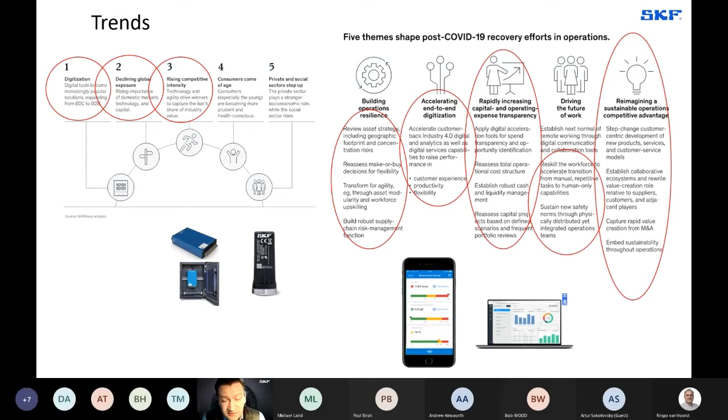And what I'm going to share today with you is some specific areas that you can see down here: sensors, connected technologies, and how SKF can provide value in these areas for you, our clients, and the industry.

SKF - just jumped forward there, sorry. The vision of SKF is a world of reliable rotation. We see the future as digital, electric, and clean. Our 6 strategic focus areas are digital sales, new business models, innovation, our world-class manufacturing to support that, future in our workforce, and clean tech - sustainability is a huge part of SKF's value proposition.

How does this affect connected technologies, sustainability, etc.? What I'm talking about here today will align in the interest of the customers, SKF, and the environment. The value and vision is sustainability for ourselves and a lot of our clients, and how connected technologies play a major part in that.

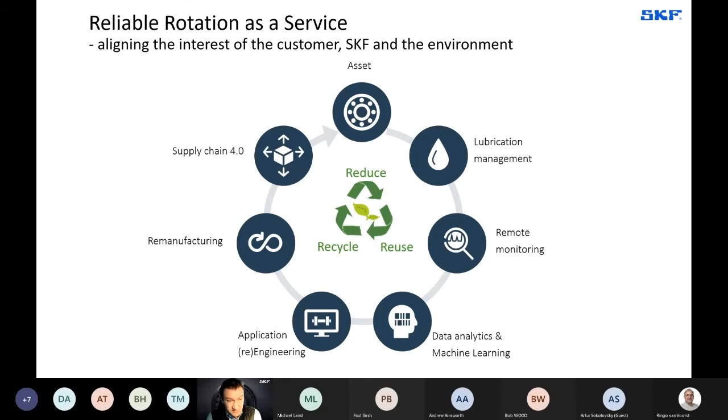If we can enable our customers to both reuse and extend the life of their components, their machines, their manufacturing, this all has a positive impact on the sustainable environment. And I'm going to show you some key components of our value proposition that contribute to that today.

We mentioned earlier there's a shift in business models, or creative business models. SKF historically has been market leading in products and bearings technology for rotating equipment performance, complemented by some advanced services. There's a major shift now from those transactional products and services to outcomes, and the focus is on business outcomes from our customers.

You'll see a lot of digital technologies here today, complemented with SKF products. Our focus is on the productivity and efficiency, the environment, sustainability, and business and financial targets of our clients.

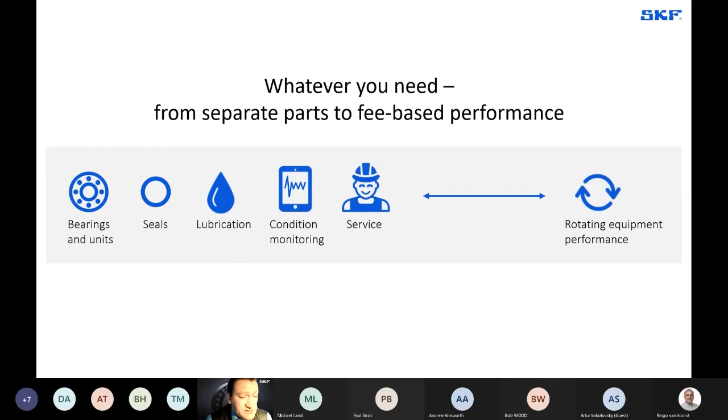How do we do that? We combine all these various elements, whether it be bearings and units, seals, lubrication solutions, condition monitoring, and services for rotating equipment performance. We focus on the client's goals, the client's pain points. We have benchmarking tools, assessments to discuss, and then focus on what products, services, and solutions can combine to meet your plant performance and KPIs.

If you take here a historical view, that products and transactionals is not going away. That's still our core business. It's still extremely important to a lot of our clients.

If we look at digital connected technology, our focus is on the performance and KPIs and what we can combine, and these steps here shown within our service contracts enable us to achieve the plant output and availability for our clients.

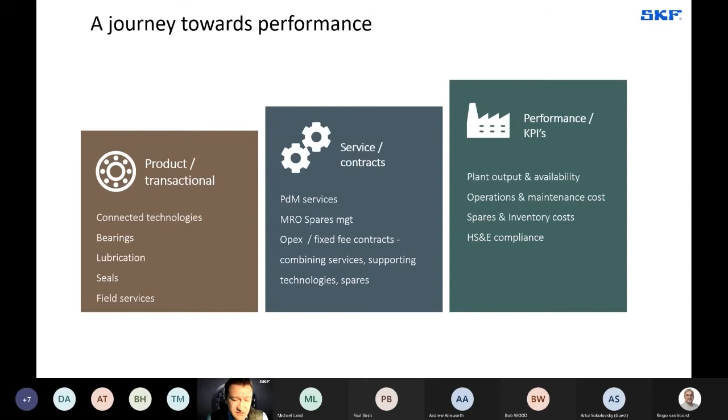I'll go into a bit more detail about that. We have wireless single point sensors. We have mobile devices for walk round routes, and then we have some more specific areas: TraX Automotive, railway devices, and unique sensor bearings, also areas of fibre optic sensing.

We have further webinars. There's a rail webinar in June around specific rail areas, and these other areas will come up. So if you need more information, you want one-to-one, please let us know. We can take that, and there are further webinars I'll share at the end on these areas.

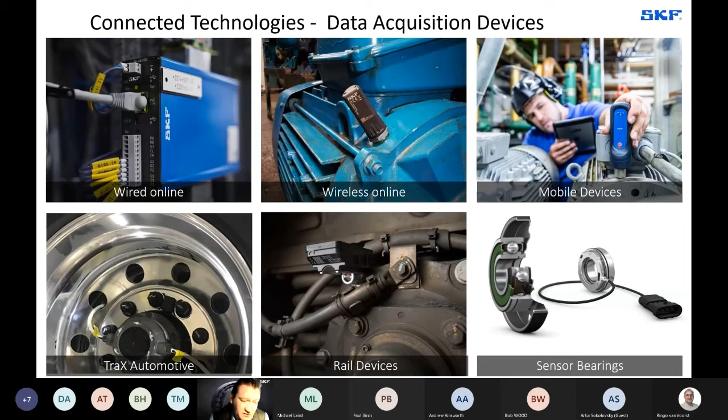So using these data acquisition devices and technology I just showed you is fantastic, and there's a lot of technology out there in the marketplace at the moment of sensors and solutions that you can buy. I think it's really important, and where SKF add value, is turning those sensors and technology into solutions.

And how do we do that? SKF has over 100 years of rotating equipment performance and application engineers around bearings, lubrication, seals, failures, root cause failure analysis. That knowledge has been built into our analytics and software to enable analysis, diagnostics and prognostics to enable decisions and actions.

And that is a continual evolution. It's happening at a low level and a high level, and I'll give you some more information, but that's a key focus for SKF. We spoke about business KPIs.

That's only collecting data and enabling the collection of data via various technologies and solutions, which is fantastic, but what do we do with that data? How do we turn that into decisions that can affect your business and improve your business?

The way forward with these connected technologies, our future is one software platform. We are not there at the moment. By 2022, we will be feeding all our technologies into the one platform. I think it's important to show everyone the roadmap and the vision, where we will be and where we are.

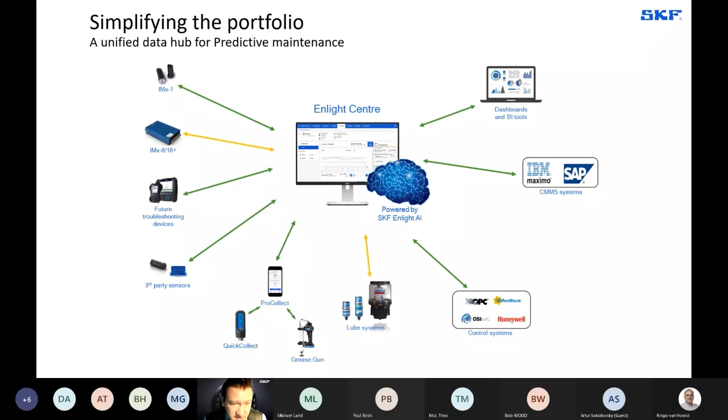So there's a wide array there at the moment. They're working in a few different platforms, and going forward in 2022, we will have them integrated to our front-end dashboard.

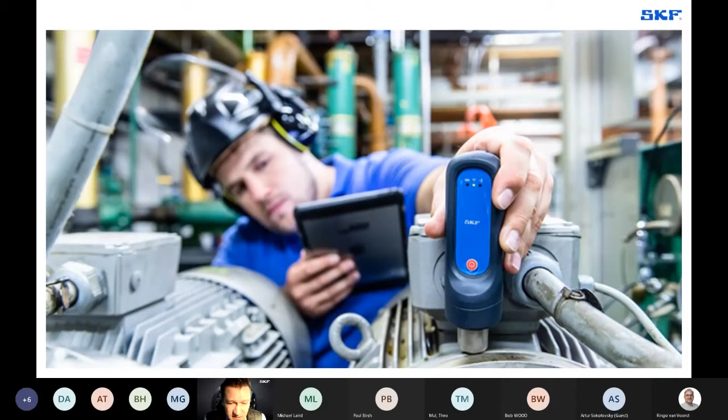One of the entry-level products I'll show you is our SKF QuickCollect sensor. This is a sensor for vibration and temperature monitoring. It connects to a phone or an iPad using either Android or Apple iOS. It's an app you can download in the store at the moment and have a look at that. This enables an entry-level vibration analysis and machine health check that can be scaled up into various different business models.

We have customers using this tool and software to provide their own analysis and reporting. They can then tap into SKF remote diagnostic services, or they can have a tailored business model for both, doing a level of analysis and reporting themselves and utilising SKF in other areas.

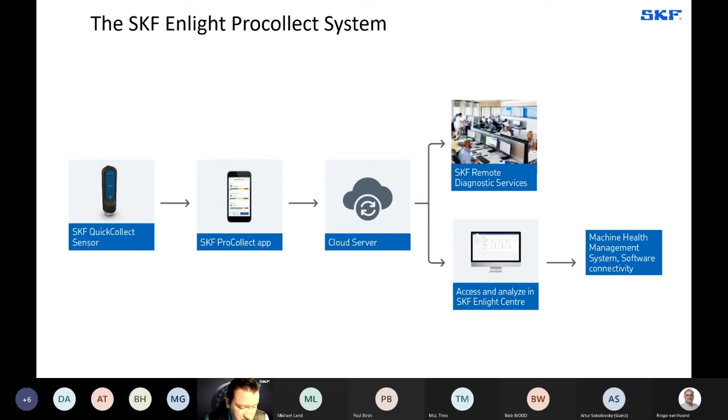So that's your entry level product you can use in facilities, operations, sites for vibration, temperature, machine health monitoring. The beauty of it is it can be upscaled into both basic machine health up to a performance contract. You can see there the kind of visuals and graphics you would get on your iPad or mobile device - vibration, enveloped acceleration, a picture of your equipment. You can also use this for lubrication routes and watch keeping, not just vibration and temperature. It can really be expanded into an overall solution.

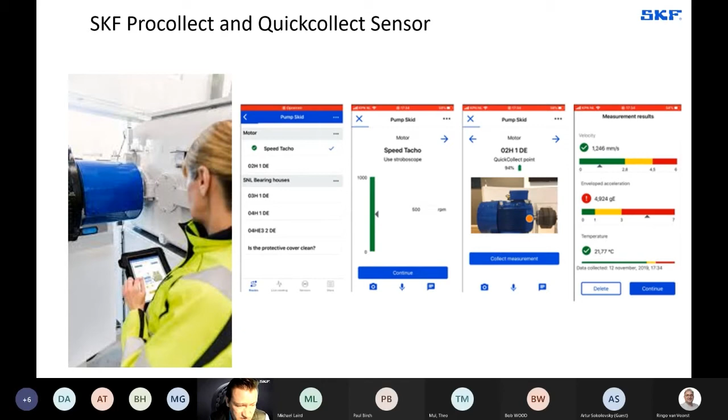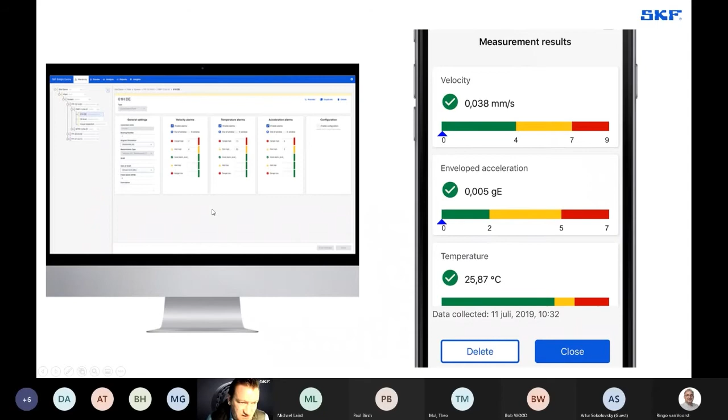This then connects to our software, Enlight Centre, which can be expanded - as I showed you at the start, encompassing more and more devices as we move forward. In Enlight Centre you can start to do more trending, monitoring, and dashboard facility across your whole equipment range.

This is a little bit more detail on the software package in Enlight Centre. We can see here an example with bearing housings. This contains an insights page where you can see common failures, bad actors, and what areas need addressed. It's continually evolving, taking input from customers and clients on what works best and what's most effective for them in their operations.

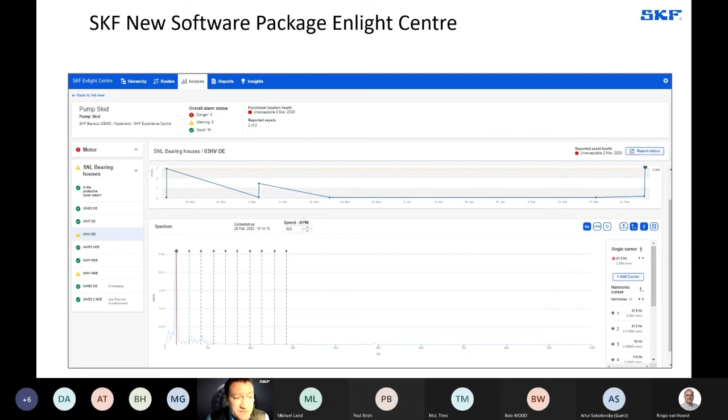Then moving on to more wireless sensors. Everyone sees wireless at the moment reducing the need for people to be on site, walking around a facility. There's huge value in that when you think of non-contact and safety at the moment - we want to reduce the amount of labour-intensive activities.

This is our IMX1 system setup. These sensors are a really attractive and scalable technology that connect to a gateway, which then connects to a collect manager and connects to SKF Cloud. You can see the results from these sensors both on site, and SKF can check the results on the cloud, giving you asset health warnings. This is quite a paradigm shift in scalable technology and sensors to be deployed across facilities and operations.

It was just released last year, and it's grown significantly across the world and here in the UK at the moment.

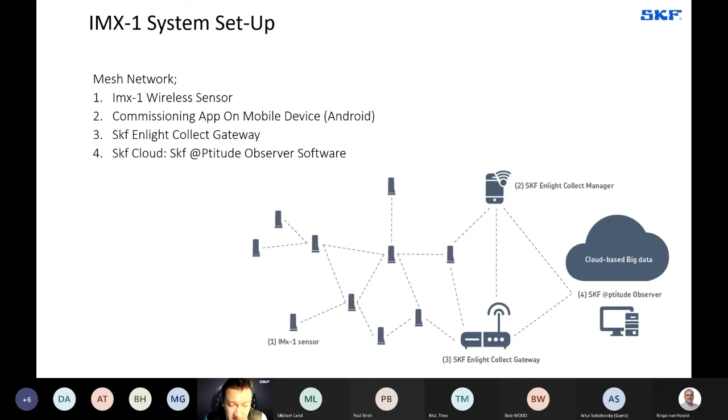Moving on, you've gone from our mobile vibration and temperature solution to wireless, and now this is our continuous monitoring for critical equipment. We call it IMX8 or IMX16 - the 8 or 16 being the number of channels this will input and take.

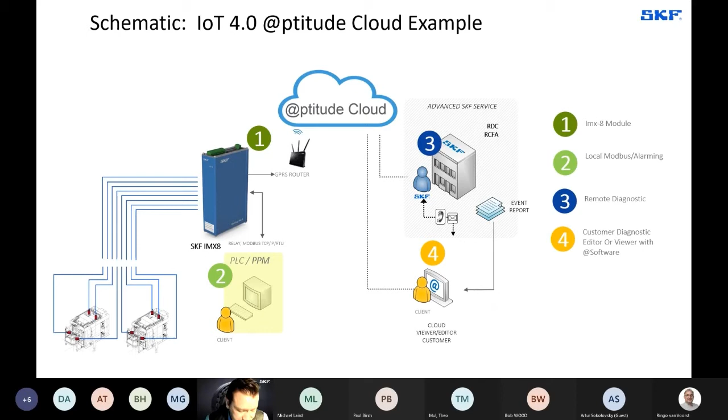This has been used across many industries in the UK and around the world - there's not many industries I can't think of. Here in the UK across our team, it's extremely valuable and popular in marine, wind industry, steel mills, paper mills, chemical - various different industries. It's a very, very scalable product.

This product will continuously monitor and can be integrated with many aspects of your system, your DCS, as you can see here. It can connect to the cloud, connect to PLCs, and connect to RDC centres.

The capabilities of it are really impressive. It works on our Observer software engine, and a key thing that's been very valuable for customers is remote access. If you have a difficult to access area, whether a remote location, maybe a pumping station out in the countryside, you can connect this via a GPRS router, so you don't need telecoms communications - we can fit that to it itself. It can also be powered over Ethernet, which brings a lot of value as opposed to having its own power source. So a very, very scalable and valuable solution that's proven popular, where people wouldn't have expected to be able to deploy continuous monitoring systems at scale.

They're now seeing this technology - it's very, very possible.

Also has the ability to connect to an API web service. Interoperability and integration with clients' databases and client systems is hugely important. At the moment, everyone wants a level of integration. If we have another software coming on board, how can it integrate with our systems and our current solutions that we have in place?

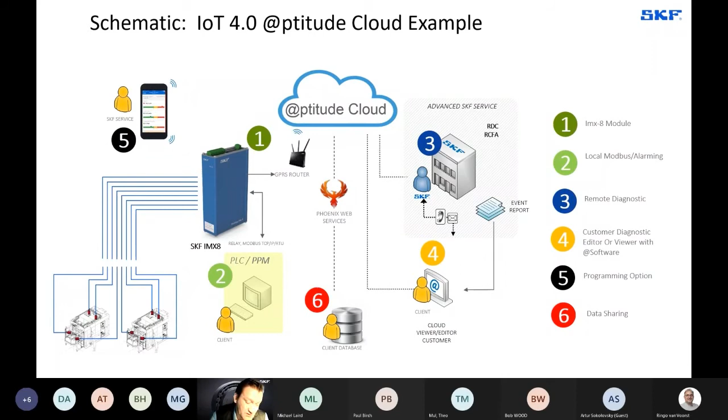We have a web service API interface with these IMX and Observer solutions that provides an ability to do that, as well as being able to export to Power BI, etc. The data is extremely valuable for SKF to give you decisions. We're providing the opportunity for you to use that data, your own data on your own machines, and make the most value of it in whatever way you want, as well as what we can do with it for you.

One key aspect of SKF we haven't spoken about much is bearings. It's the core business of SKF, and all these technologies work around monitoring the bearings. Another key component of the bearing and its maintenance is lubrication. One of the most common defects is lack of lubrication, over lubrication, or wrong lubrication. So one thing SKF can do is provide a multi-pronged approach, providing solutions for your lubrication as well as your monitoring and asset health.

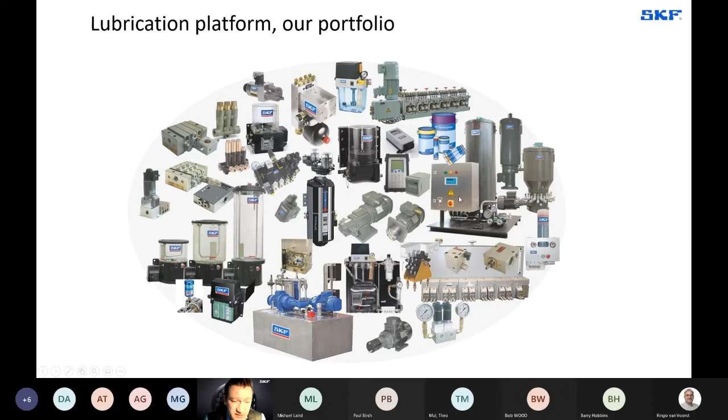Why is this here today on Insights and Connected Technologies? Because our lubrication products - you can see many there, a wide range of lubrication products, auto lubrication SKF provide - are now evolving and becoming wireless as well and connected.

Here you can see our historical System 24 single point auto lubricators that have been very popular across industry. One criticism of them has always been - and throughout my time these are fantastic products - although you encounter the problem once you fit them: who knows when it's going to run out? Who knows if it's functioning? So it may solve a problem, but it can create a problem.

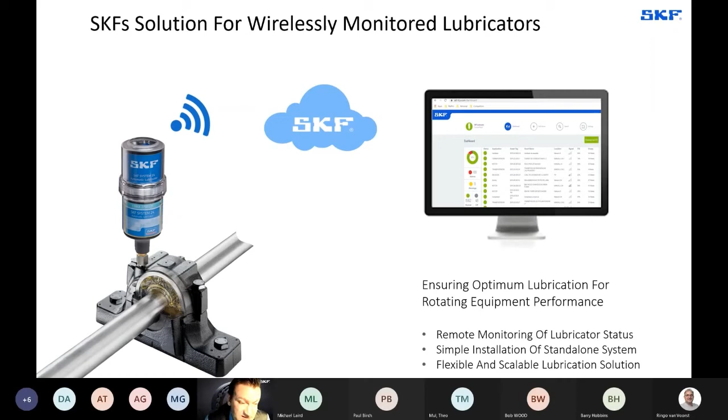We have now introduced technology that meets that. You can now connect this lubricator wirelessly, and you can have a dashboard to see when this lubricator requires topping up, and whether it's operating and working. Combining that with condition monitoring and vibration analysis, you now have the function where I can tell when this is lubricated and what is the status of my lubricator. So a really valuable evolution of turning data into decisions and providing the solution to those decisions.

This is the concept, a little bit more about it. The connected lubricator works via a gateway, a cloud, and a user web interface and lubricator control panel that you can see there.

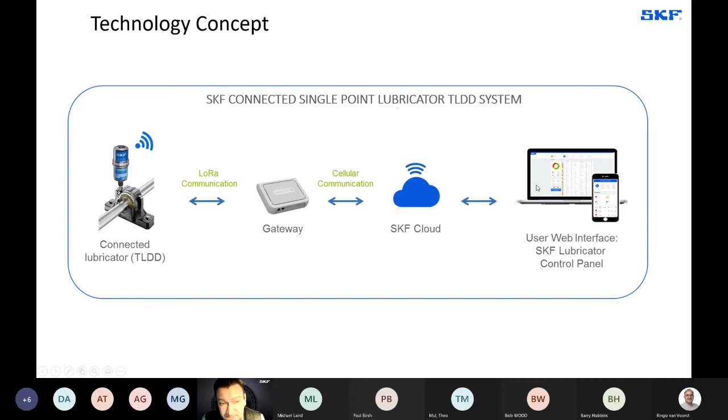Moving on from lubrication - vibration analysis and artificial intelligence, part of the whole Industry 4.0, is a huge subject, hugely popular, and we have all these tools to collect data. SKF recently, over a year ago, acquired a major artificial intelligence company based in Israel, named Presenso, who were very successful with major OEMs in the industry, and they are now part of our data intelligence connected technologies team.

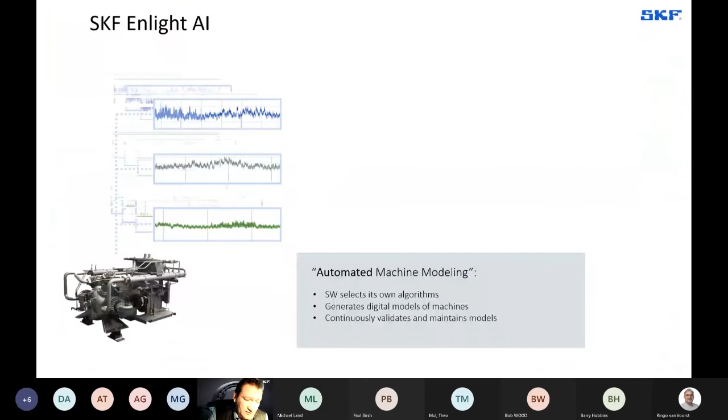So we can overlay not only our technology and tools but our artificial intelligence capabilities with this. What that does is utilise the ability to look not only at vibration and temperature, but a lot of process data. We can work with our clients - for example, they have all their SCADA data and PI Historian - and start modelling machine health and operational issues from the existing data, complementing that with our vibration, temperature, and traditional tools and techniques. Connected technologies takes us to a different and newer level, and helps us meet our customers' KPIs.

How does that work? We utilise all of this data, working with various different modelling and algorithms. We have a whole team of data scientists continuously evolving and maintaining these models. They work with the process data, combining that with vibration data to make key decisions, and we have many proof of concepts and many successes happening across the industry just now.

So this is something new with SKF. It's really exciting, and combining that with our traditional techniques and new technologies, I think it's an exciting future on how we can enable efficiency and sustainable operations.

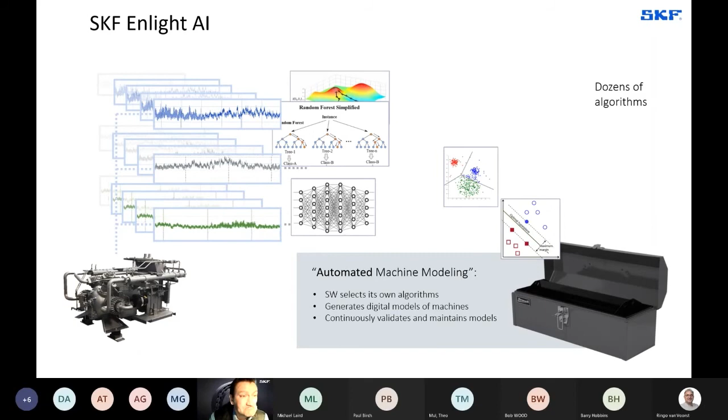So that's the majority of connected technologies today. I hope that was okay. Timing, I'm maybe a little bit early, so if anyone has any questions, no problem. I have some further information for you.